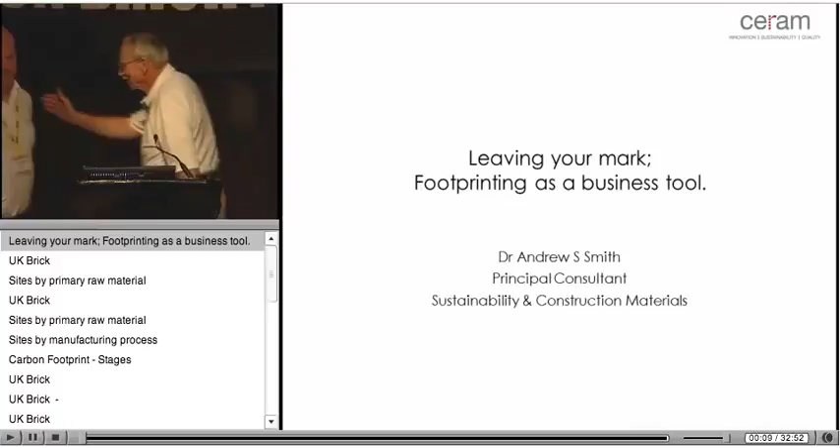Good morning to you all.

I'd just like to give a stark warning maybe. In the UK and in Europe, we're much further down the line of the regulatory requirements and the stuff that Terry and Susan have just been talking about. We're actually already 10 years down the line on most of these. We have the limits. My advice is keep fighting your corner, because beating them with facts is better than beating them with fiction. And the one thing that the industry within the UK and particularly within Europe as a whole has come together, and they've generated enough actual scientific fact to defend the position that's being made. So more power to your elbow with that.

When all else fails, look at the threat as an opportunity. What I'd like to present here today is some of the work that we've been doing, which is really starting to look at the things that we have to do and how to turn them to a benefit.

And I'm sure you've all come across the phrase of footprinting. And footprinting really is another way of evaluating what you do, how you do it, to come up with a process-type optimization. But it's done within a framework that is dictated by others.

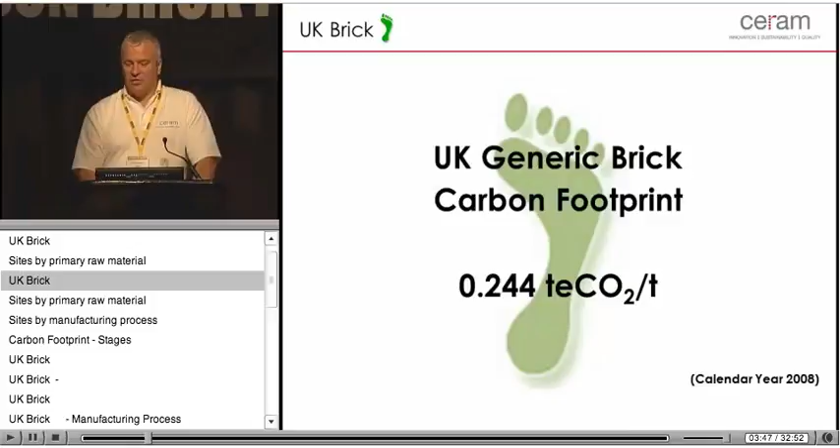We looked at 4 different types of clay, although there are somewhere in the region of about 30 odd different actual types of clay that we use to make heavy clay products, which are obviously bricks, pavers, roof tiles and clay pipes in the UK.

The dominant ones are the shales, the carboniferous shales, so what you guys would call probably Mississippian horizons, we call the carboniferous. But they're the coal measure bearing strata within the UK.

The Etruria marl is a subgroup of that. It's the Rolls-Royce of clay making in the UK. It's the one that everybody wants, but not everyone's got.

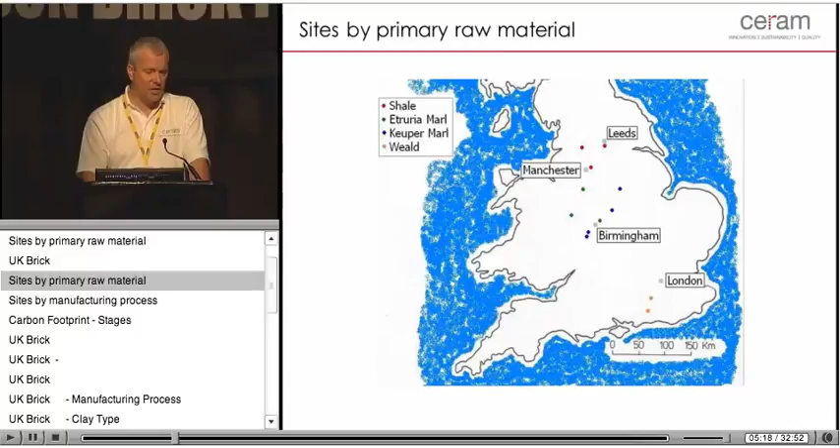Then we have the Keuper marl, which is a predominantly lime-rich and gypsiferous type of clay. And then we have the Weald, which is the youngest of the clays here that we're dealing with down in the southeast of the country. Typically used for stock-type bricks, so soft mud process.

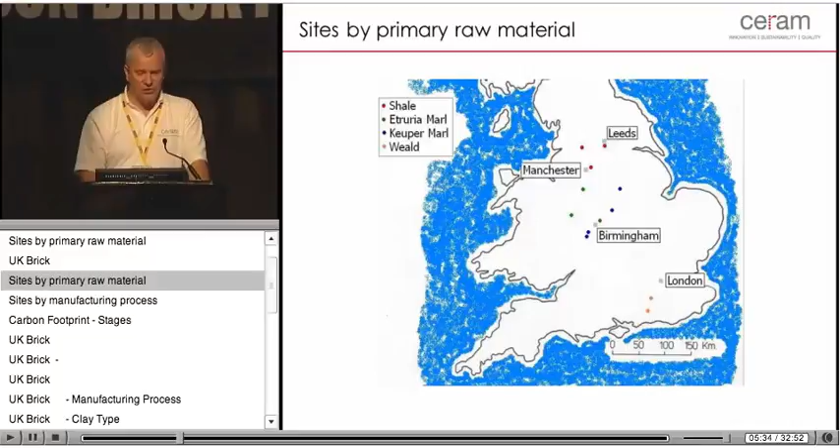All I've done here is change the colour of the dots to just show you here which are the extrusion works and which are the soft mud works.

The carbon footprint we were asked to look at is what's known, for those familiar with LCA or life cycle analysis terminology, as a cradle to customer study. So it's all of the raw materials, all of the production including site office which is classed as a scope 3 emission, transportation from the production facility to the first stage - the customer or merchant's yard - and also a portion of head office function, if that's not on the particular site.

Within the scopes of ISO 14064, or the WRI, the World Resources Institute, which is a scoping way of looking at all your GHG emissions, we have three scopes essentially.

One is the emissions from combustion of fuel-based emissions from your site - the burning of natural gas, the burning of any oils, etc.

Then you have the emissions from your mains grid supplied electricity. Effectively you have to account here for the transmission losses in the grid and also the amount of electricity you're using, on the basis of the actual emissions as a result of generating that electricity at the power plants.

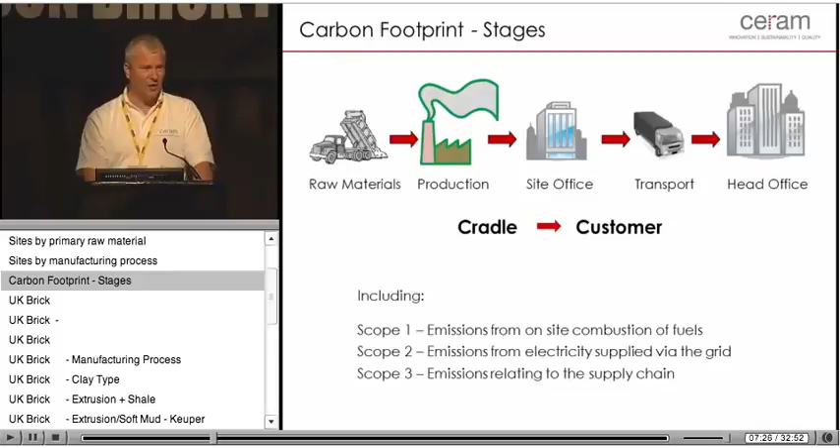So the carbon footprint - what do we look at? We looked at raw materials, the quarrying of those raw materials, the transportation, and the additives going into the brick bodies such as barium carbonates, pigments, stains, sands, and we're looking at the thermal breakdown processes that give us emissions.

Then we're looking at the production process, which is essentially the energy we put into the kiln and the dryers, and running all of the equipment - the electricity, the natural gas, the fuel oils, etc. And then we have the site office, the transportation of the product, and the head office.

Put into context here for delivery, the average distance that bricks travel in the UK is about 80 miles from factory to the user. So we're not talking about huge transportation issues here.

Then finally, the contribution from your head office. And boy, don't those head offices take up some energy - all that aircon, all that heating, all that hot water. But let's put it into context.

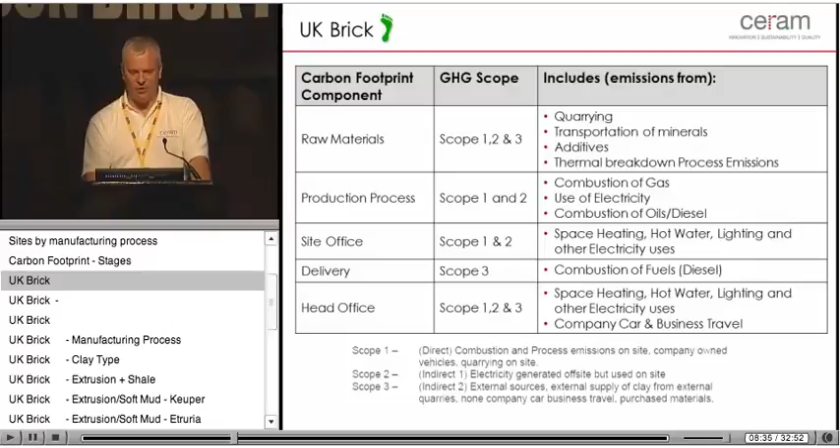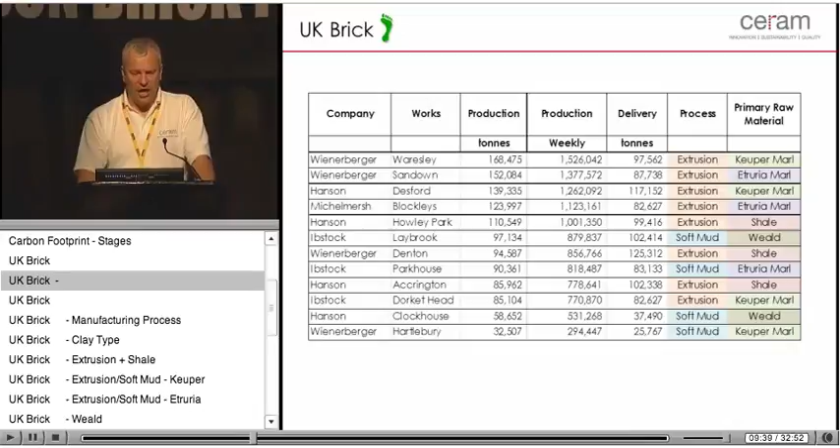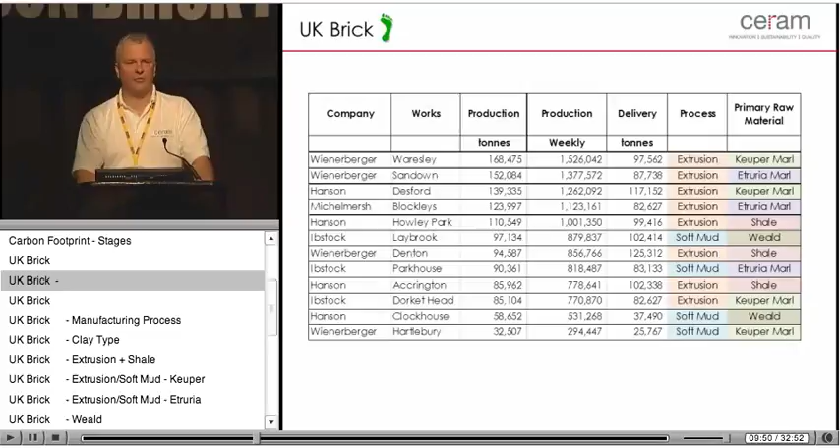215mm by 102 by 65. We're looking at production from about 1.5 million bricks per week down to about just shy of 300,000 bricks. So we've got a range here of size of works that we've looked at, a range of different manufacturing processes, and a range of different raw materials.

We've got a range of different manufacturing processes, and we've got a range of different raw materials. Let's throw those all into the cooking pot and let's see what comes out.

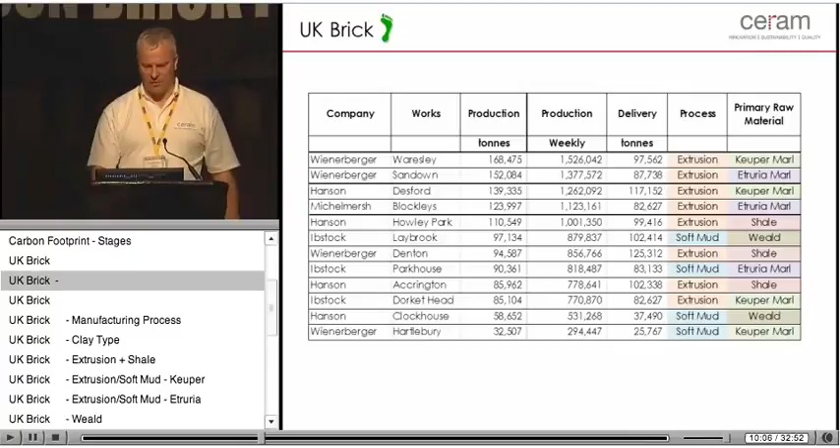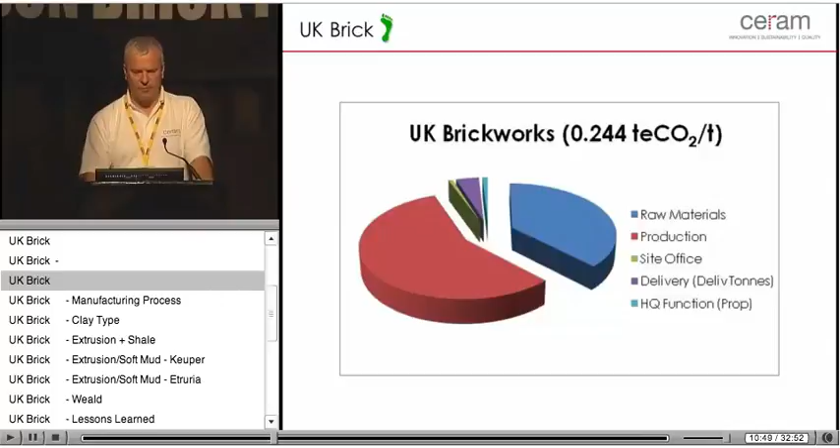So that's the average there for the UK brickworks, this generic single brickworks. If we start to break it down now by looking at the data and look at the extrusion works versus the soft mud works, hey, look at these.

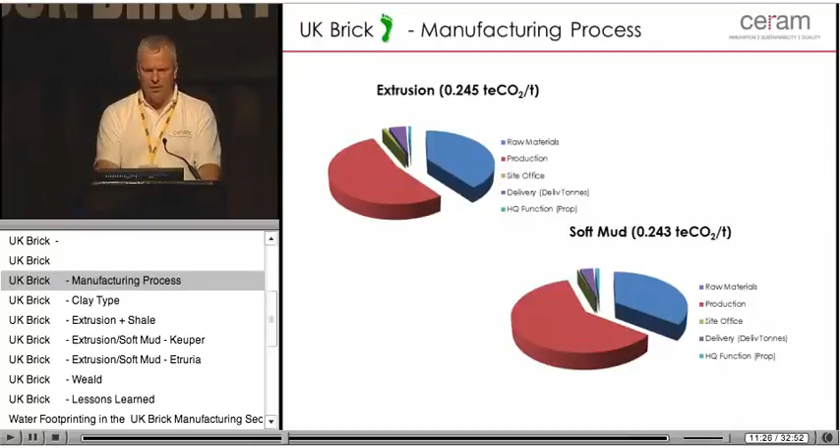And the one thing that we have to account for in the UK and in Europe on the emissions is actually called process emissions, which relates to emissions from the raw materials as well as the energy. So we get hit by a double whammy. Not only is it the energy we use, but we also get hit by the CO2 emissions from the clay itself.

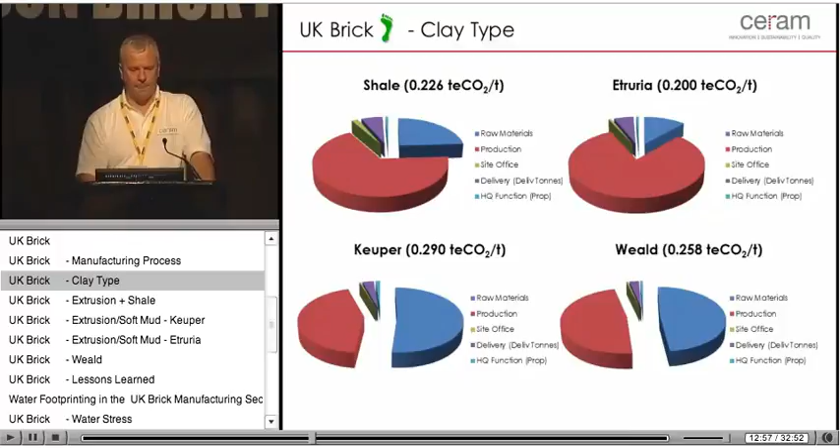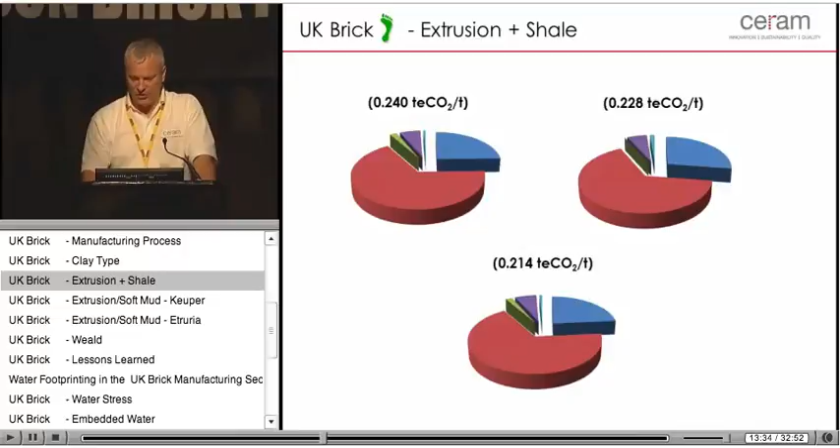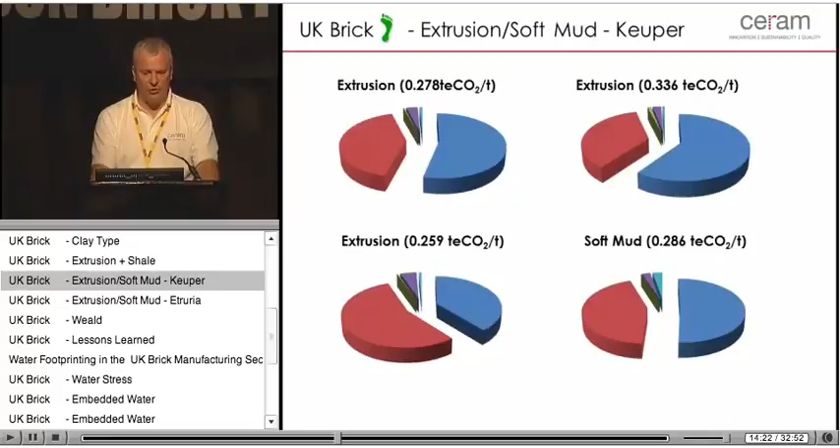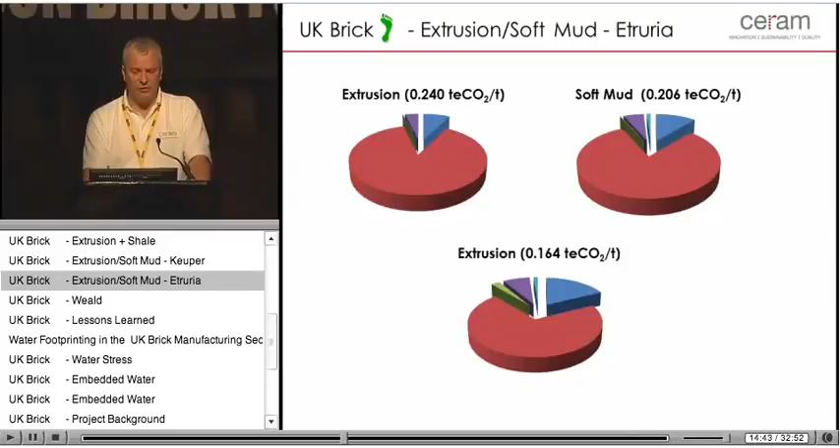If we look at the Etruria, well, what does that tell us? Well, if you could have Etruria in your yard, that's what you'd have. Lowest levels of emissions. They're predominantly controlled by fuels, so they're the ones that you've actually got the most control over. If your raw material is coming in, you haven't got that much, apart from in the quarry, of actually going for lower CO2 emitting materials.

And then if we have a look at the Weald, again, the Weald is one of these clays which has quite a lot of fossiliferous material in, so it's got a lot of shell fragments. And again, if you're producing there with a product that you're putting a large amount of body fuel additives into, you have to account for those if they're on the list of fuels that you have to account for in GHG. Then you're up at around 300 kilograms, so significantly higher than the national average.

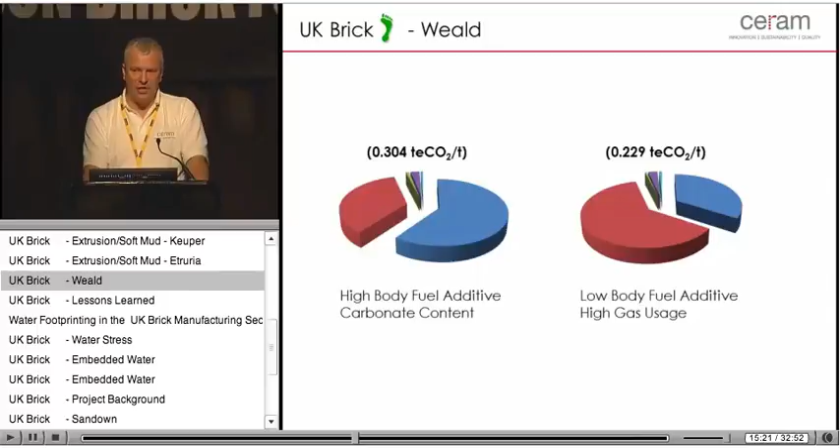So what are the lessons learned here? Well, raw materials have a significant part in terms of your carbon emissions. If you have to account for them, as we do in the UK, then you have to give it some thought. You know, one point I would say is, do we really need to make buff bricks out of red clay? Do we have to penalise ourselves?

And let me put this into some sort of context. Not only do you have to pay for the fuel in the UK, but as of 2012, you'll also have to pay for the carbon you emit on a sliding scale. And at the moment, the UK brick industry has an 80% exemption of that level. But that's a sliding scale that will go down to 0 by 2020. So every tonne of CO2 that you emit, you will end up having to pay for in some form of taxation.

So that means that the price of carbon has become another metric that you need to look at if your business is to thrive. Every tonne of carbon you can save, either by process efficiency, fuel efficiency, switching to fuels that are non-taxable, is obviously something of great interest to the UK brick manufacturers. And if you can avoid making products where you're actually increasing the amount of CO2 going up the stack, then surely that is a way of actually mitigating these costs.

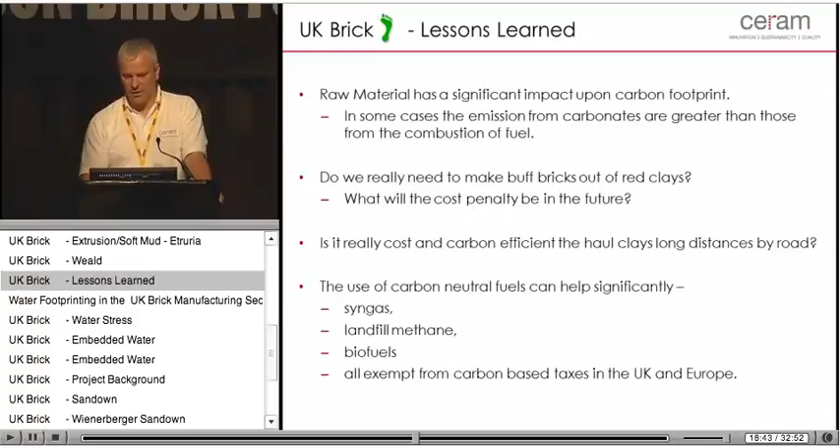So the second thing, and the thing that we've developed over the past 18 months or so, particularly within the ceramic sector as a whole, is water footprinting. Well, to most people, and specifically within the brick industry, water is not one of those major issues, but it is a vital component to the actual process of manufacturing bricks. If your clay is not plastic, if you haven't got enough water in there, it's very difficult to actually produce a brick that holds together in the green state prior to firing.

And what we've been looking at here is trying to look at water footprinting in a holistic way to see whether or not there are ways that we can mitigate the amount of potable or mains drinking water that factories use, rather than the use of lagoon water or recovered recycled water.

This is the UK's Environment Agency map for England, showing the delineations here; the boundaries that you see on the map are the water supply companies that supply different regions of the country. And needless to say, those areas in red are the ones that are under what we refer to as water stress. And this is the provision of drinking water, potable water, that comes out of your tap when you turn it on.

Funnily enough, that's where the majority of the population of the UK are based, southeast of England. There's probably about 45–50% of the population within those red areas there. So there's a high demand, and who wants to go into the bathroom in the morning, turn on the tap, and for nothing to come out?

Even worse now in the UK is that brickworks are being threatened with actually having their water supply turned off in periods of drought. And if you're a brickmaker and you're trying to make brick and you're reliant upon water coming out of the mains and you can't have that water, all of a sudden your process stops. So what we're looking at the moment is understanding actually how water critical some of these operations are.

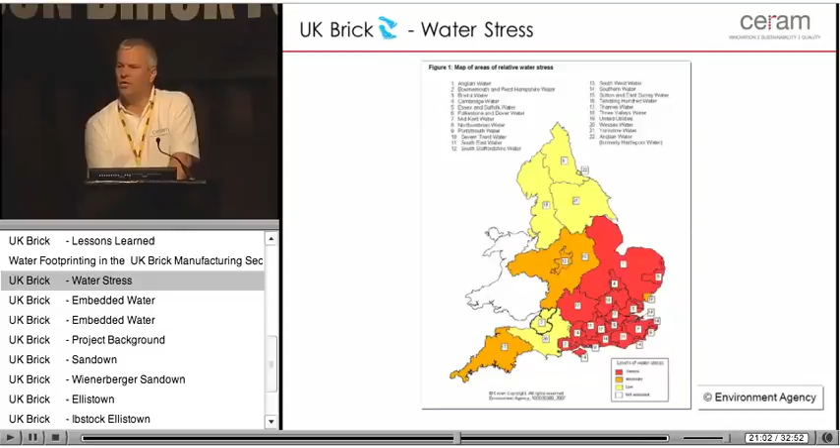Let's put some things into context. 1 cup of coffee, 330 litres of water to make that 1 cup of coffee. It's not the kettle, I hasten to add. It's not the size that you need to make 1 cup of coffee. But that's the impact of actually producing the coffee as an agricultural product, processing it, freeze-drying it, and delivering it. 1 glass of milk, 200 litres. That's basically keeping the cow going.

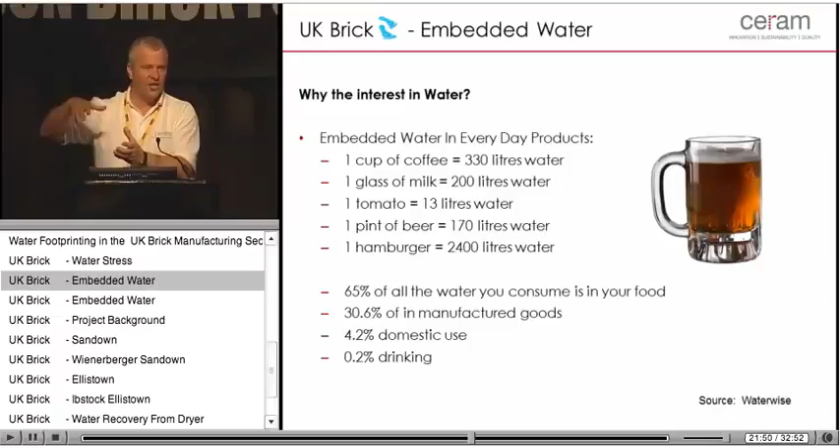1 tomato, 13 litres. Now, I'm not sure whether that's what we call a beefsteak, which are about that big, or the little cherry tomatoes, which are about that big. Pint of beer, 170 litres. And if that cow then goes on and becomes a hamburger, 2,400 litres of water. So what does that information tell me? Drink beer, less water impact.

If you break it down, 65% of all of the water you as an individual consume, me as a Brit consumes, is based on the food that we eat. 30-odd% comes from manufactured goods that we use, 4.2 domestic use, so if you go to the bathroom a few less times, that number gets better. However, 0.2 of it is actually related to drinking water. So the question here for industry is, how reliant should we be on drinking water, quality water, for our processes?

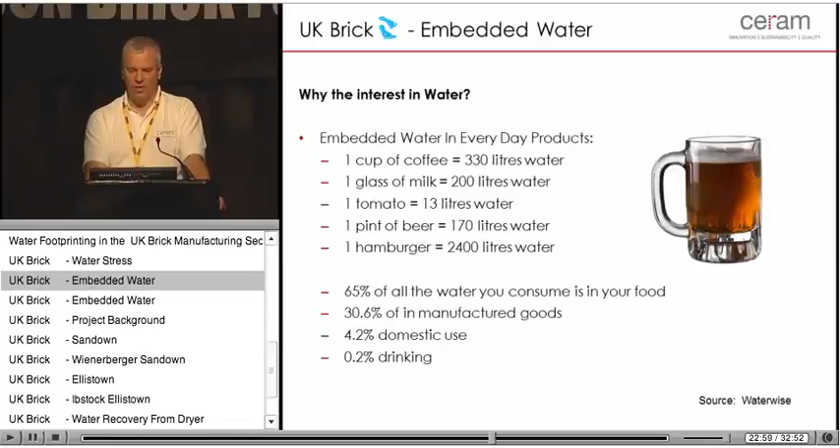This one will frighten you, I hope. But let's put it in a context. A family car requires 440,000 litres of water as part of its manufacturing process. This is embedded water within it. That's 440 tonnes of water per car required.

It actually stops to make you think, particularly when we're now looking at producing a lot of our agricultural products overseas in water-stressed parts of the world. And we're shipping out manufacturing processes overseas to water-stressed parts of the world. It may be helping us in the short term, but unless we get a handle on the actual way that we use water and the impact of that water, then we could be just storing up problems for ourselves in the future. Or in the case of what we're doing probably at the moment, we're going for the lowest buck, but we're exporting the problem and it becomes somebody else's problem.

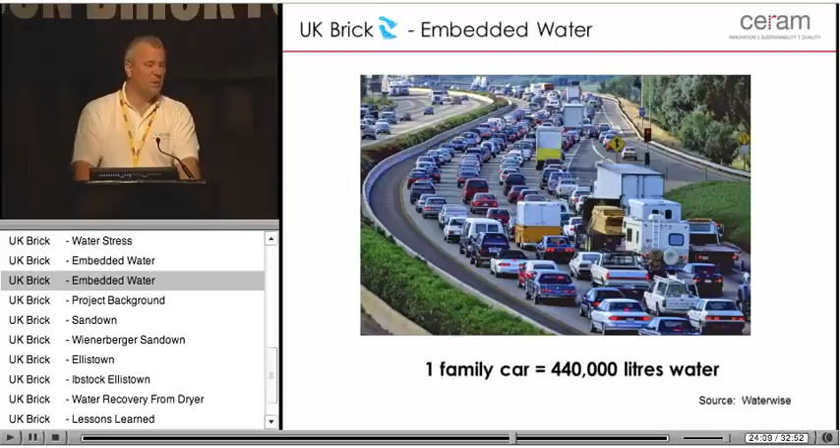So what we've done is we've looked at a number of different ceramic processes, 2 of which were brickworks, 1 soft mud and 1 extrusion process. The Sandown works is operated by Wienerberger. It's an extrusion works. It works on an Etruria Marl. It's about 1.1 million bricks a week, so it's a 55 million brick production per annum size plant. 31,670 metres cubed, equivalent to a ton. So 31,600 tonnes of water used in that production process, of which 17,000 tonnes comes from the raw materials itself, and the balance comes from mains water. So this is potable drinking water that's been through all of the processes, but we're dumping it into brick manufacturing.

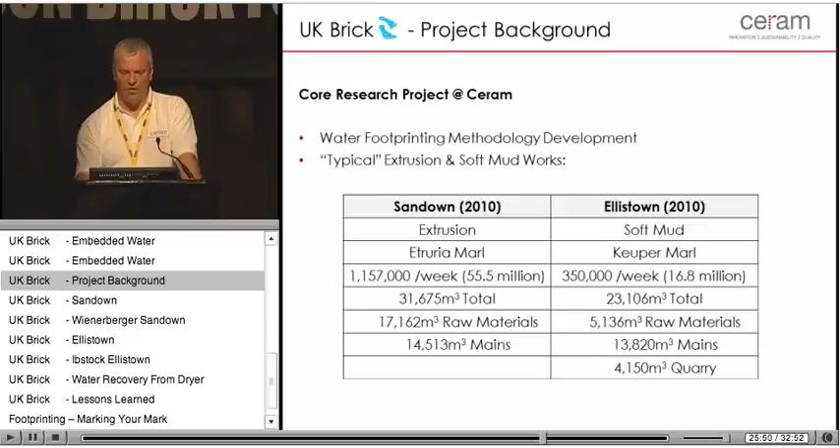Ellistown, operated by CRH, or Ibstock as they trade in the UK, is a soft mud works. It's a smaller works. It's only 350,000 products a week, so it's about a 16.8, 17 million brick a year production facility. 23,000 metres cubed of water, and the breakdowns you see there. So 5,000 for all raw materials, 13 from mains, and the balance there coming in from the quarry. The interesting thing here is that both of them have rather significant quarries with lagoons, and therefore there is the potential here of reusing lagoon water rather than going for mains water. Ellistown is the only one that does it.

As I alluded to earlier, it does rain in the UK occasionally. We do manage to fill lagoons occasionally, but we also have very stringent regulations with regards what you can take from those lagoons, because the Environment Agency see this as another way of getting the water back into the ground so we can then pump it out and process it for drinking water later. So ground recharge is one of those areas that we have to be quite careful with.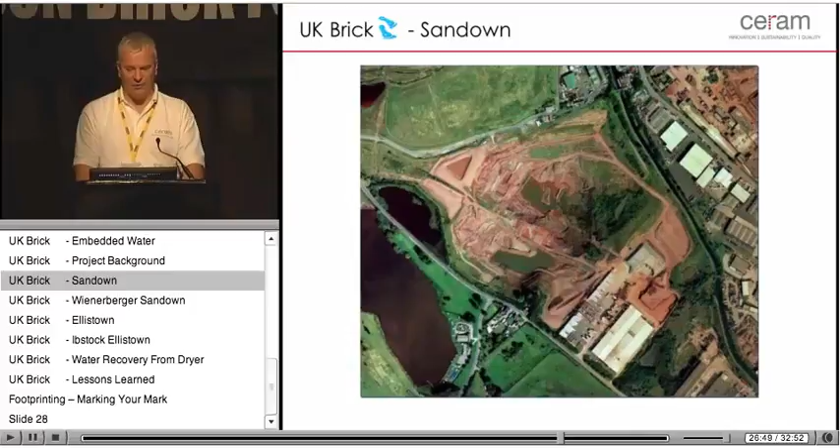There's a shock. We weren't really expecting that. But the question is, is that water that's coming out of the dryer potentially usable? I'll leave that one for a moment.

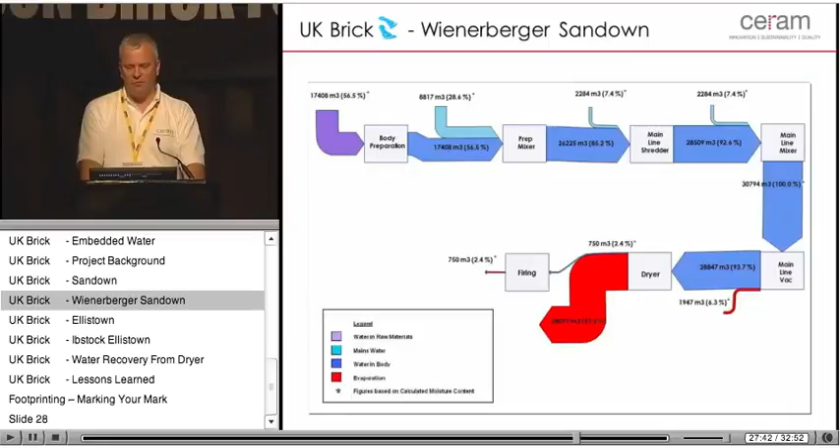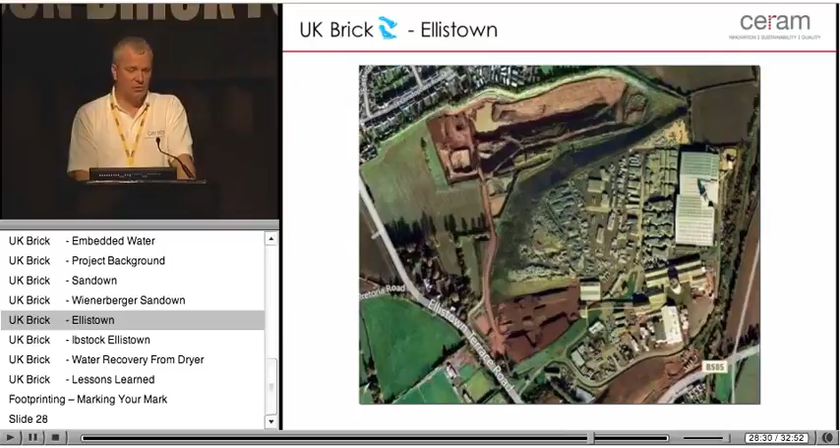But we do have a pipeline that runs from that lagoon into the brickworks. It's a soft mud plant, so the balance of any water required, and therefore minimising the amount of take from the actual mains water supply itself, is done here by taking from the quarry water itself.

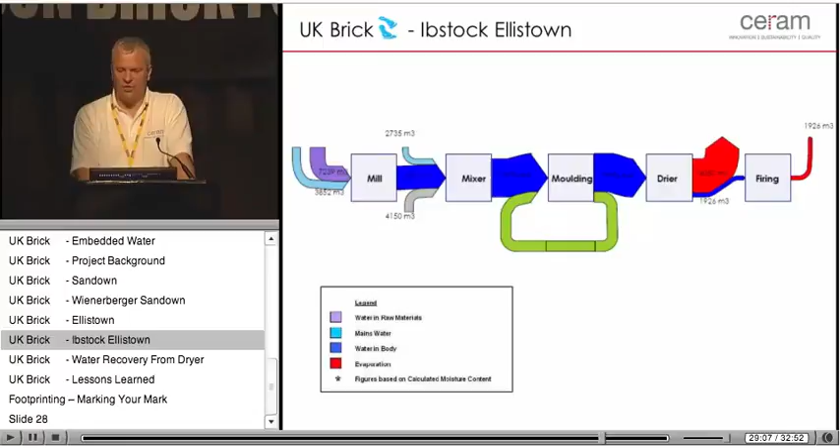Being a soft mud works, it also needs to use a recirculating system to actually wash out the mould chain. And here this is a closed loop system, so all it does is top up, a bit like a domestic system. So we're recycling water already in one part of the process, but the potential for recovery is a lot greater later down the process itself. Somewhere in the order of about 16,000 tonnes of water potentially that we can recover.

Is the technology available? Well, yes, it's not rocket science. All we've got to do is put a condensing unit on the exhaust ducts coming out of the dryers. Even better than that, there's technology available now where we can use not only heat exchanging principles, but we can also recover the water as a byproduct of that process as well. So there is technology out there to be able to get the water back in a meaningful way at a relatively low cost.

The question then is, what do you do with your 16,000 tonnes of water? If you don't pump it into your quarry, can you pump it into a holding tank? So here's a thought. Will all brickworks in the future have a swimming pool attached to them? It's a thought. I'm not quite sure you'd want to go for a dip, though, every morning in it.

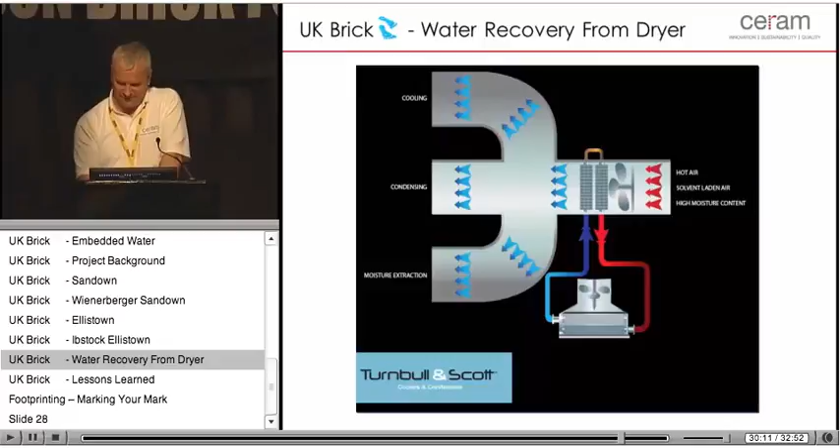What we've learnt from this exercise, and this really comes across the board, is that at the moment the price of water in the UK is not cost effective to have major capital investment. However, in the future there may well be scope for doing this.

The data is limited. Most of the meters that we have are the mains meter that comes into the factory. That's it. Water is then distributed through the pipes. We don't really know what users, what, where and how much. So the thing there is, do we need better control and monitoring of the types of water, the places where the water is being used?

One of my colleagues in one of the major companies said to me when we looked at this, well, we know we've got 3 meters. So there are 3 mains water meters coming into the site. We can only account for the amount of water we use from 2 of those. We don't know what the 3rd one is actually telling us. A little bit of investigation showed that they were supplying water at their cost to their neighbour.

So getting a handle on actually what you use and how you use it may actually tell you whether you've got a leak and all you're doing is pumping mains water back into the ground. Very, very laudable, very notable that is, but it gives you an idea. Or alternatively, if you're supplying your neighbourhood with water.

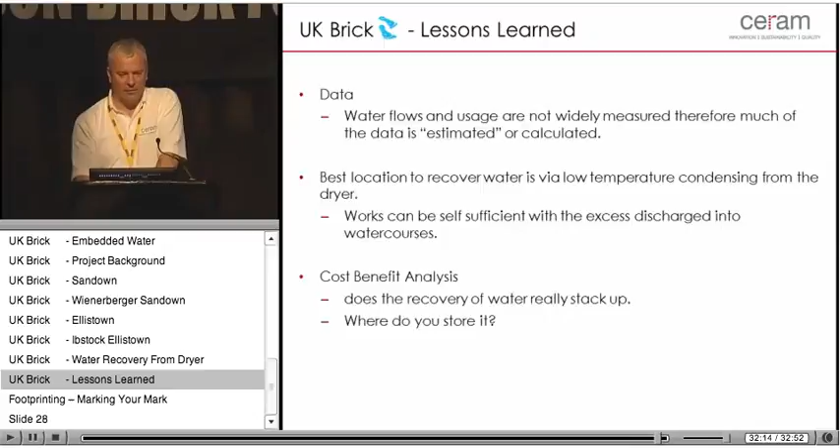The final thing is, if you do all of this work, for what it costs to get it verified, it's worth doing. Because if you have somebody coming into your works that can then verify that what you're saying is true, it carries much greater weight out there in the big wide world. One of the things one of our sister companies does is exactly this. So you can have your carbon footprint verified and you can have your water footprint verified.